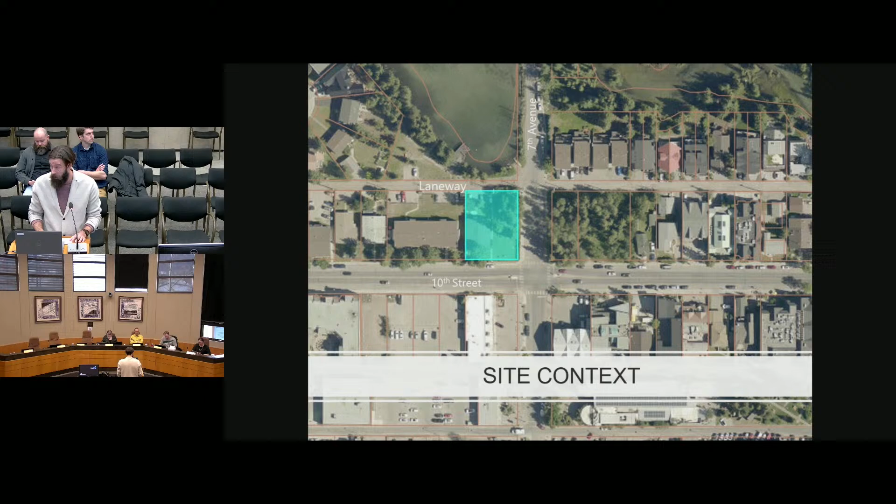Just a high-level summary of the application before we get into the details. The application proposes 3 at-grade retail sales units and 13 visitor accommodation units above the main floor, all contained within a single building. 6 variances to the land use bylaw are required, and administration supports the variances and the proposed development.

As mentioned, the proposed uses are visitor accommodation and retail sales. Both of these uses are permitted uses in the town center district.

Having a look at the built form of the development, as mentioned, it's a single building. The building is 3 stories in height. The design is a nice blend of traditional and modern mountain architecture with a good variation in color and detail. A strong corner feature has also been included in the design, which provides some pedestrian seating, shelter, and a distinct look, shown in the top left image on the screen. Administration is satisfied with the architecture of the building and believes that it satisfies the requirements of the land use bylaw.

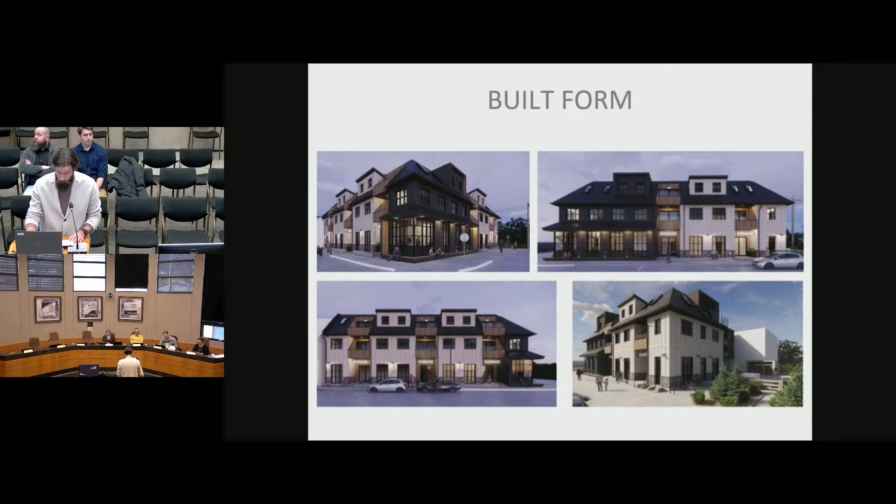Moving on to site design, the building is located adjacent to 10th Street and 7th Avenue. Behind the building is the parking area, and this area is accessed from the lane. A small patio, sort of landscaped area, is also included in the design and is located in the northeast corner.

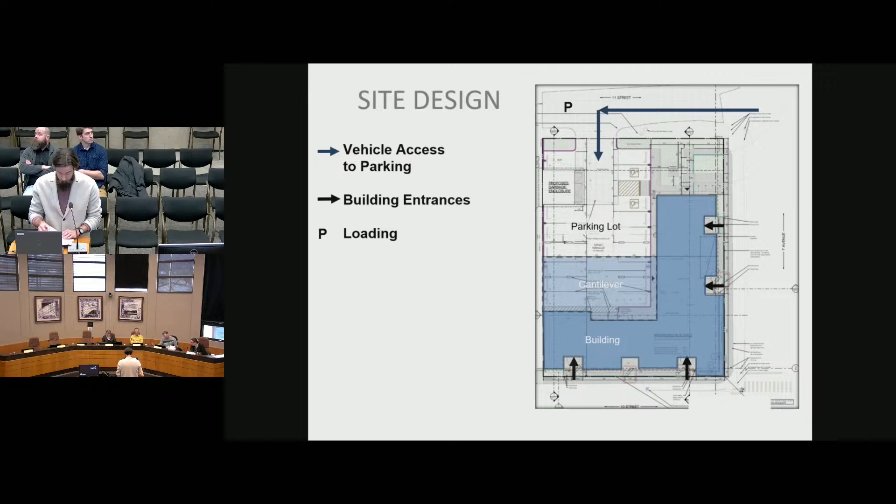So looking at compliance with the land use bylaw, the application does require 6 variances. This includes the front build-to line requirements, maximum building projections, maximum building height, minimum water body setback, minimum vehicle parking stalls, and the minimum corner visibility triangle setback.

I'm probably not going to dive into the building projections piece. I think it's clearly handled in the staff report, but if there's any questions on that, I'm happy to speak to that at the end of the presentation.

So without further ado, we'll jump right into the front build-to line variance. The land use bylaw establishes a 1 meter built-to line in the TC district, with some requirement for articulation, 20 to 40% of the facade should be articulated back to create some interest. The building itself is set between 1 meter 5 centimeters and 1 meter 6 centimeters, so it's a very minor deviation from the requirement.

And the corner feature itself is actually closer to the front property line. It's 80 centimeters back, so there's a little bit of variation there, so it doesn't quite meet the standard, but overall administration is satisfied that it's meeting the intent still of what we're trying to do. There's lots of articulation along the frontage. The corner feature, which is closer to the property line, actually provides a bit of a benefit with the pedestrian seating and so forth. So administration feels that the variance is minor and supports it.

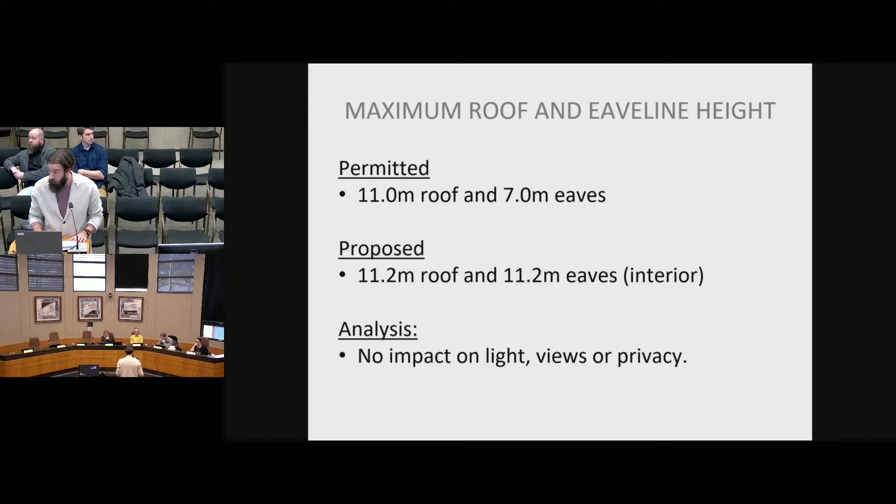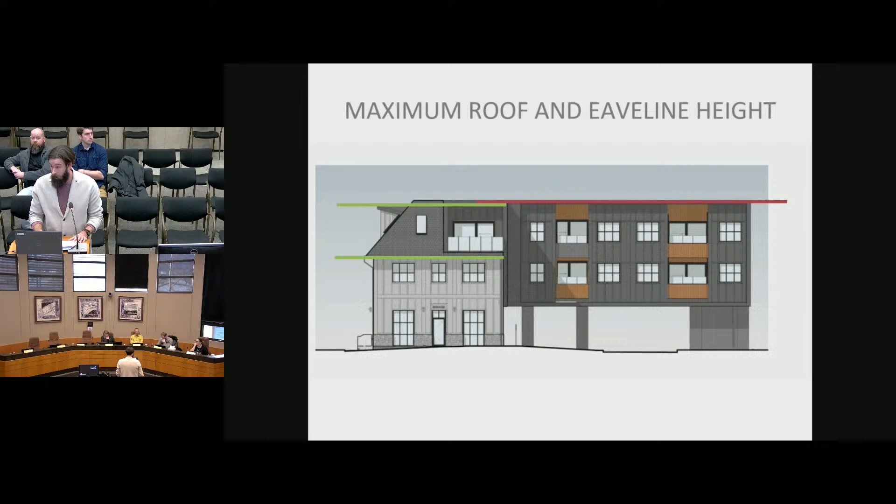Here's just a visual of the two. The lowest green line represents the maximum eave line height, which the front of the building is compliant with, whereas the back, as mentioned, the roof and the eave are essentially the same. That's where the eave line variance comes in, and then the roof overall is a little bit taller, as you can see from the higher green line. In administration's opinion, it's a minor variance, so we are supporting it.

Moving on to the water body setback, the LUB does require that development be set back 20 meters from a water body, with a possible 5-meter variance for commercial buildings if the remaining area enhances the riparian habitat, or is landscaped, or is really not causing any significant impact there. There's a focus here on the protection of the creek and the riparian area.

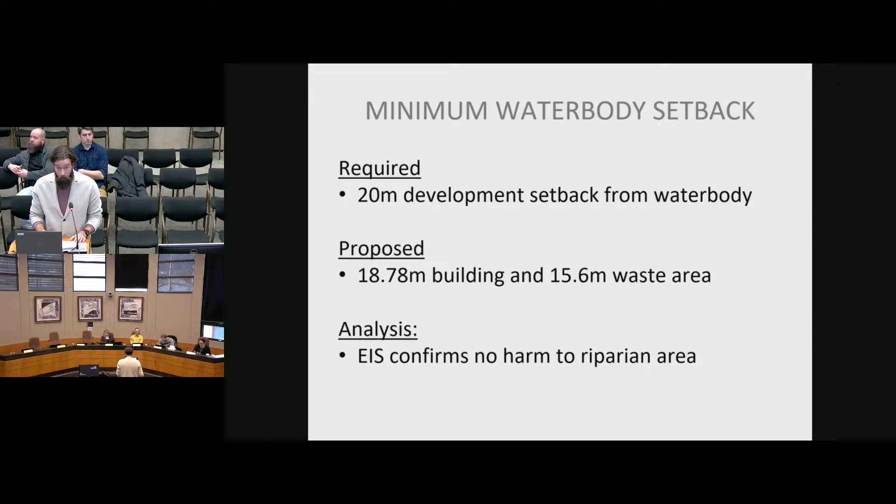The proposed building does encroach into that 20-meter setback. I'll just show here for added clarity, a corner of the building encroaches within the 20 meters, including its eave. It's 1.22 meters into the 20 meters, and the waste area is 4.4 meters in there within the 20-meter setback area as well.

So in response, we asked the developer to prepare an environmental impact statement to evaluate the development, where everything is located, and the adjacency to the creek. The statement prepared concluded that the development doesn't propose any harm to the riparian area. The drainage will all be handled on site, so there's not going to be anything leaking towards the creek. From the site, we did have the EIS reviewed by our third-party environmental consultant, and they concurred with that assessment.

Just for note, the third party did raise that there could be creek bank enhancements made as part of this application by the developer, which was something the EIS said was not possible, but administration has reviewed that recommendation and feels that given there's a laneway between the site that doesn't have direct access to the riparian area, and also the pond is actively used by the public as an amenity, it wouldn't really be fair to place the enhancement on the developer.

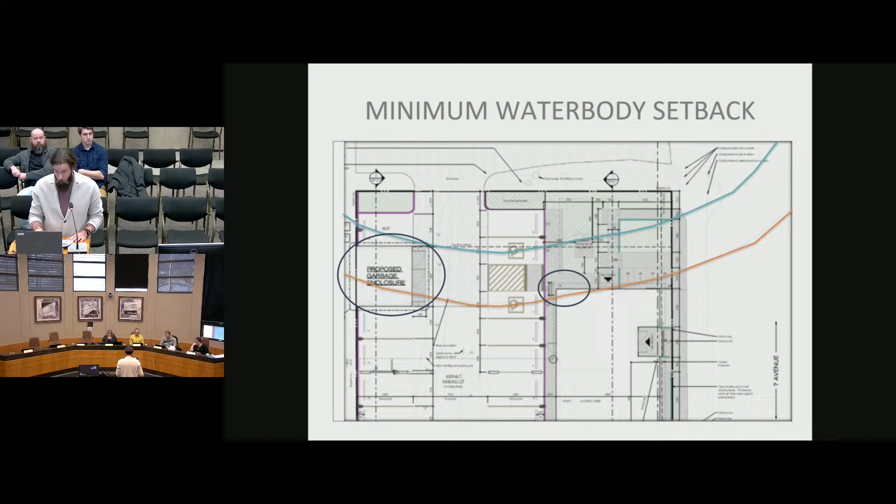All right, moving on to parking. Vehicle parking: the development is required to provide 19 vehicle parking stalls, 16 are proposed. The remaining 3 stalls will be provided through cash in lieu, which is permitted in the TC district. Administration doesn't have any objections to cash in lieu. The number of stalls is quite small, and again, it's an option that can be considered in the TC district.

Administration recommends that CPC approve a reduction of up to 1 parking stall for the mural, so instead of 3 parking stalls paid through cash in lieu, it would be 2. CPC is the authority for that reduction, and that's one of the reasons the application is coming to CPC today.

The applicant is here today, so they can speak more to the details of the mural if there are questions. As you'll notice in Schedule A, a condition has been added to ensure the mural is provided, or there'll be a security deposit provided should the mural not be. So either they do the mural, or we use the security to pay any remaining cash in lieu.

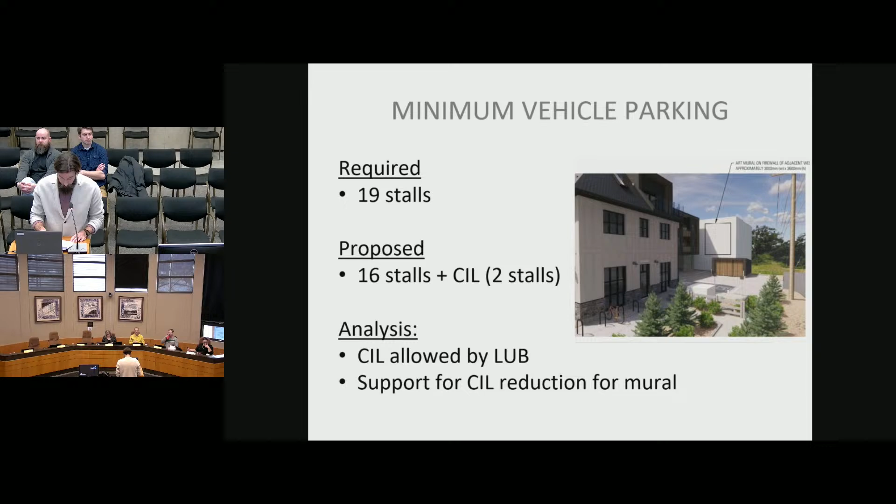Finally, in terms of variances: the corner visibility triangle setback. The LUB restricts structures between 1 meter and 4 meters in height within the corner visibility triangle, which is a setback from the intersection to allow for visibility.

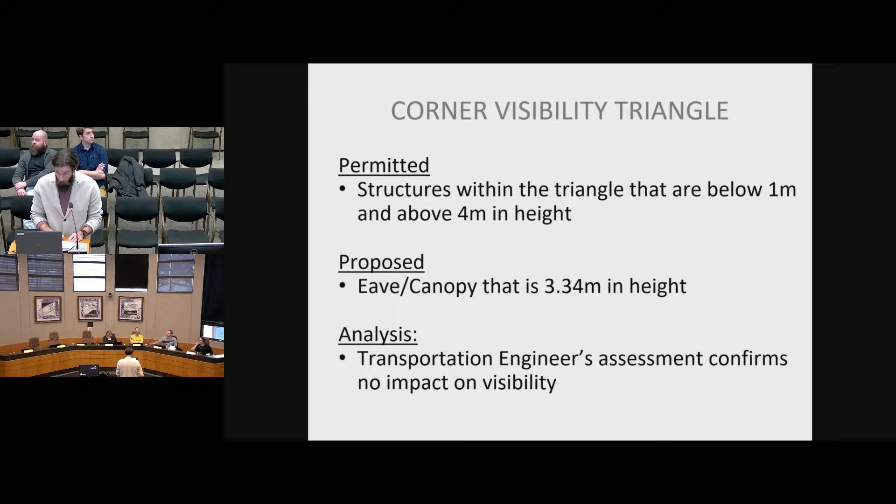The applicant is proposing an eave at 3.34 meters in height that encroaches into the setback. That's part of the corner feature. I'll show that on the screen there - it's that piece within the red circle.

A transportation engineer on behalf of the applicant assessed the impacts of this and indicated from their analysis it won't impact visibility at 10th Street and 7th Avenue, which the town's engineering department has accepted. As a result, administration has no objections to the proposed variance.

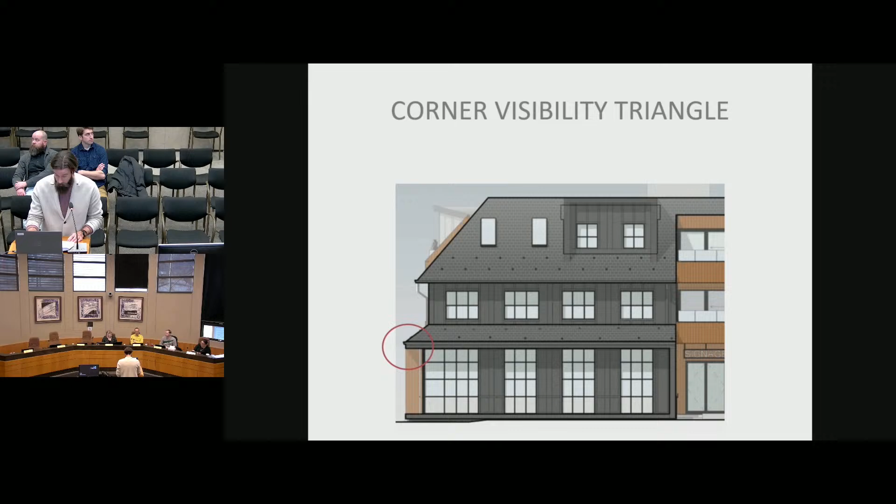With regards to what we heard from the public, a notice of application was posted on the site for 10 days as required. Administration received feedback from 2 residents. Their concerns were related to the loss of rental housing in the community.

The Development Authority does not have the ability to require rental housing from the landowner or require that the landowner maintain the existing rental housing. Given the proposed application, these are permitted uses. There are some variances needed for the application, but they are, in administration's opinion, minor, so they're not drastically changing the intent of what was envisioned for those uses.

So given that, there's really no opportunity to get rental housing in this development unless the applicant volunteered it, which they're not in this case.

Looking at the SSR, the Sustainability Screening Report, the applicant's report scores 3, suggesting the development will have a slightly positive impact on the community. There's nothing really to highlight in the SSR, either as a big impact or a big offset.

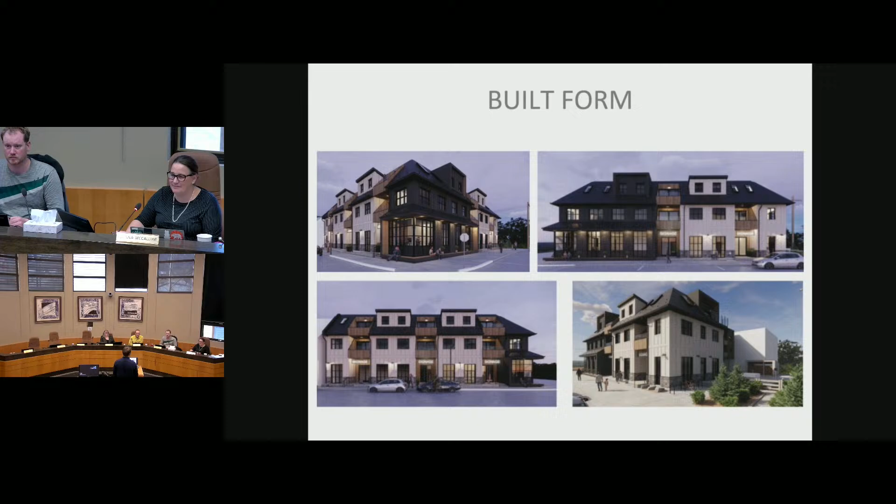I'm not worried about the parking part. I'm just wanting to make sure there's employee housing for people to actually clean your room - on site's generally the most economical way of doing it. Fair enough. The owner would probably have that opportunity at some point to get a new development permit issued if you wanted to add that. It's not something I can really speak to, to be honest. Gotcha, okay, thank you.

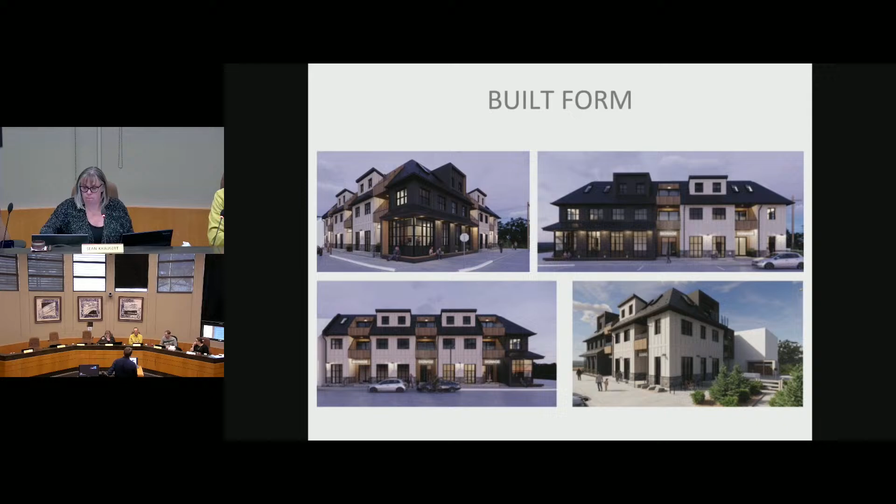Thank you. Are there other questions of the applicant, Mr. Youngan? In terms of the architectural expression, could you give us a very brief rationale - is the building intended to evoke some kind of historical context within the community, or is this like a modern farmhouse style?

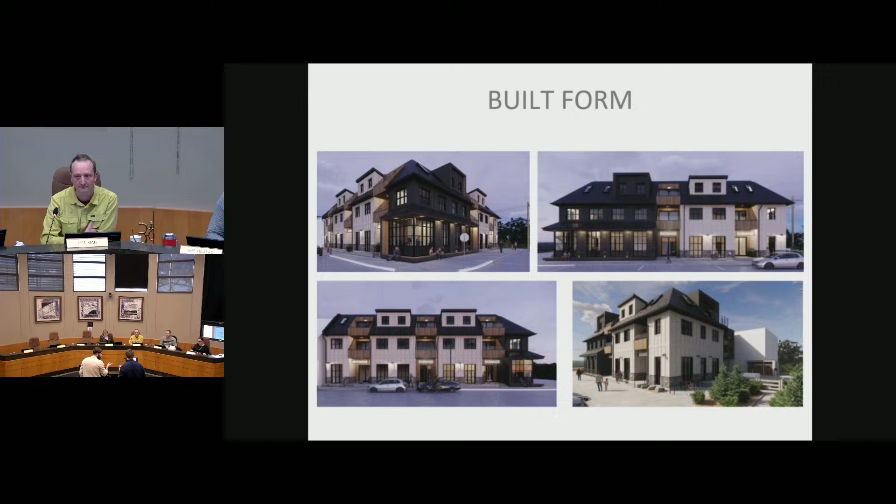Just very briefly. Sure, I do have some photos if needed, if you want to see them - Nathan, perhaps you could help me out with that. I think it might help. Just pop this thing in there. Probably - oh, I don't know if mine there. Yeah, go for it. Okay, sure, it will be brief, but I still think an image would be useful. I'm sure IT is cringing somewhere with you. Maybe, we just got the new system and it's befuddling sometimes.

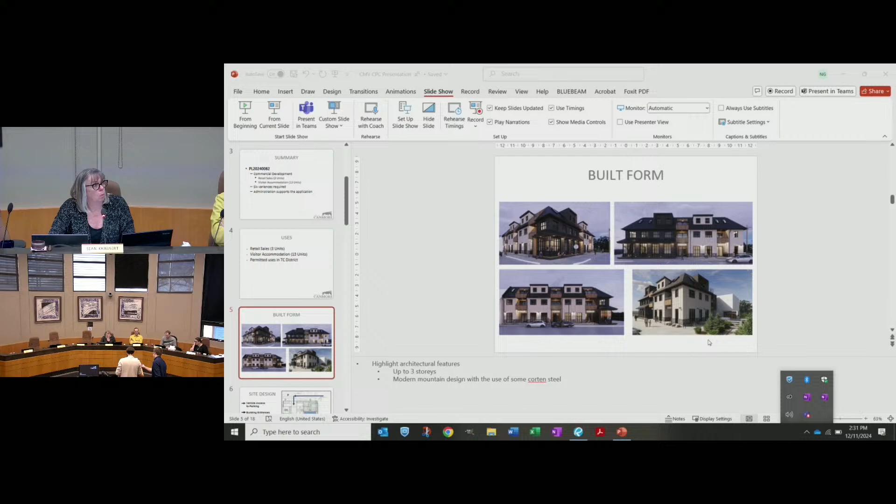Do you want to handle this? Yeah, Mr. Gravel, I might get you to pull the recommendation back up on screen. Take it out. Okay. There you go, go for it. Thank you, and then I'll also ask if you have any closing remarks or comments on this. Nope, none. Okay, great, thanks. So with that, just to start the conversation going, I will move that Canmore Planning Commission approve PL 2024-0082.

Sorry, I lost my page over here. Subject to the conditions of approval as set out in the amended Schedule A. So with that, are there any comments?

Councillor McCallum: I would be prepared to support this application. I think it fits in that corner, and the variances are minor, as described. I'm happy to hear that the mural will require a DP. And my only detraction to the project, which is immaterial, is that there isn't employee housing when we have a 0% vacancy rate in Canmore, and that does not bode well for the business model. But otherwise, I will be supporting this application. Okay, thank you.